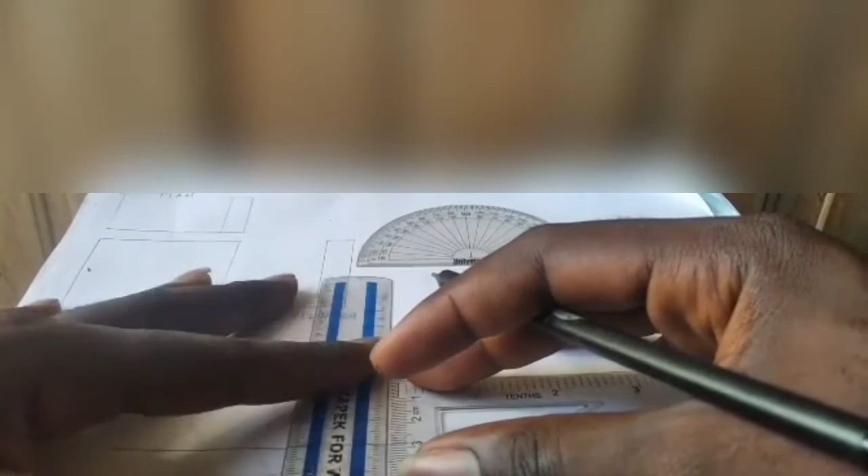So today we'll be drawing a step, and as you can see, the first step is to draw a horizontal line and draw a vertical line to bisect the horizontal line. Okay, so you have to just follow the steps one after the other. So this is step one of the first part.

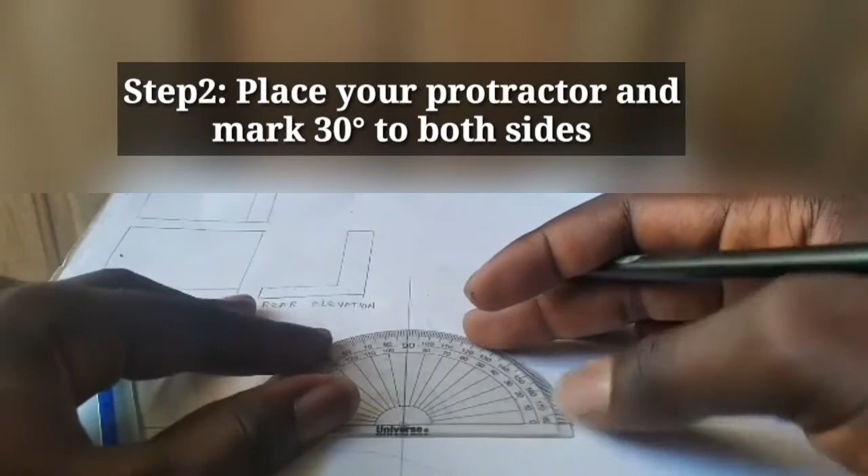So this class will be divided into two parts. One will be drawing a box, while another part will be cutting out our main diagram. So for the first step, we've done that. Now for the second step you have to place your protractor and mark 30 degrees to both sides. Okay, so let's mark it to both sides just like I'm doing right now.

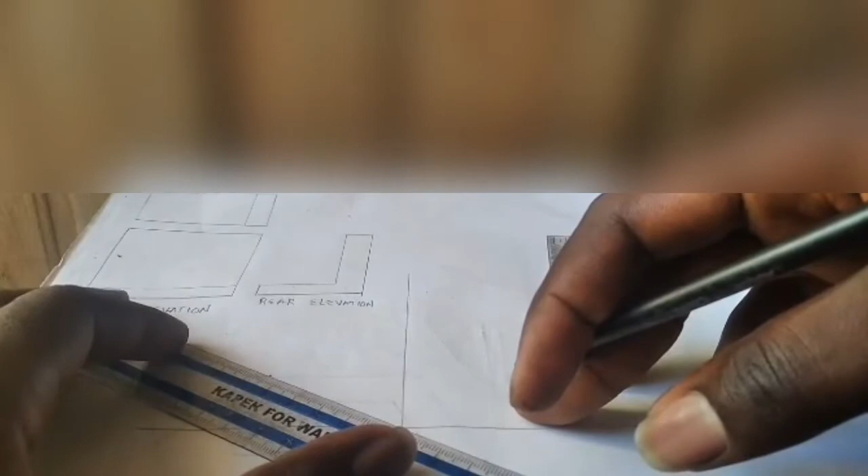Okay, now the next step is for you to join the 30-degree line with the intersection of the vertical and horizontal line to both sides. Okay, you can see the step there.

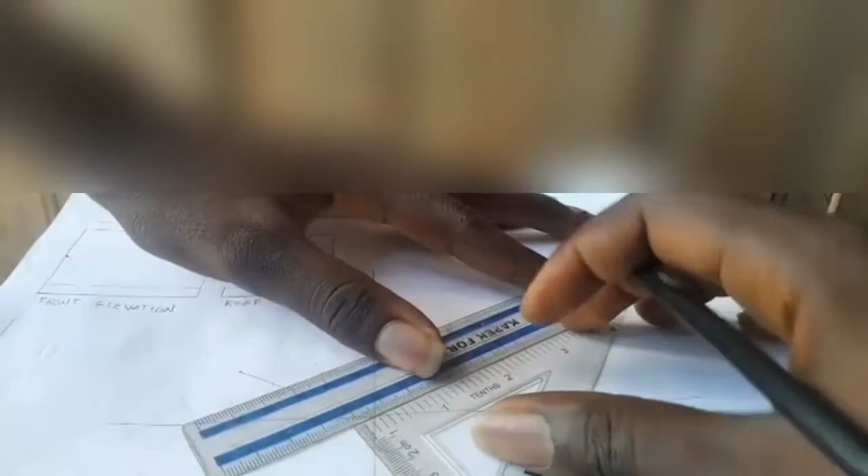Okay, so what I'm trying to do here now is to complete the box. Remember, this is the first part of the class, and the first part is for you to draw a box.

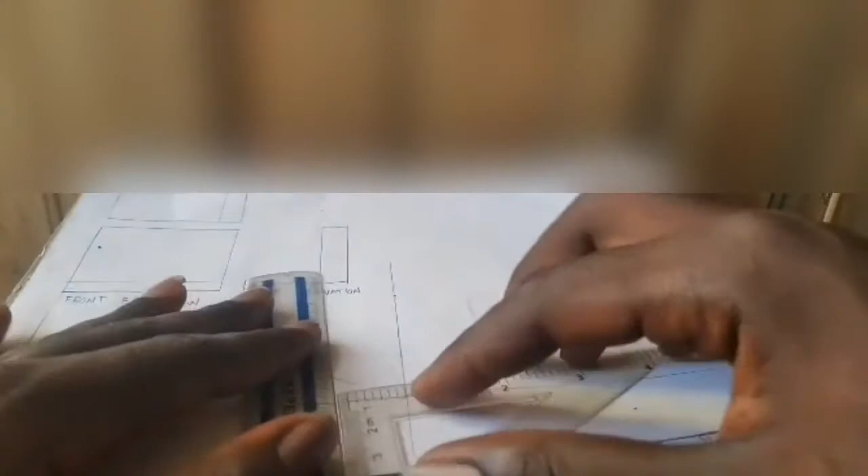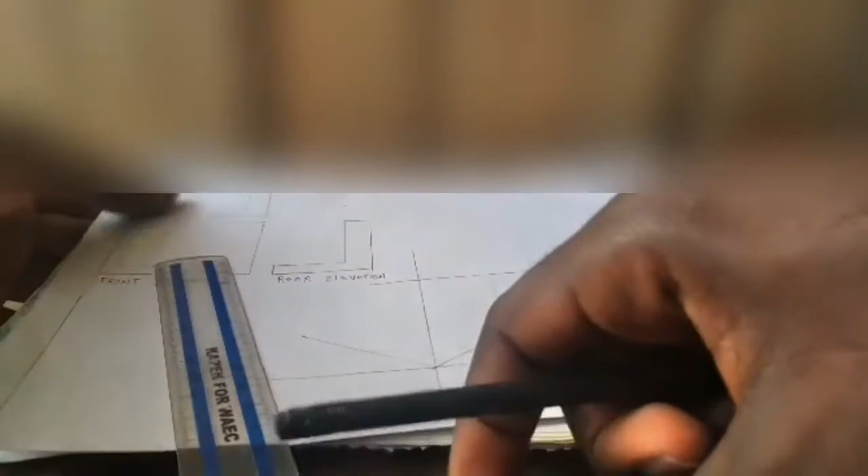And so for the next part, you have to mark out 6 centimeters on the vertical line. Afterwards, you have to transfer the horizontal line below to the vertical line you marked out 6 centimeters on. So you'll be doing that to the 6th centimeter mark.

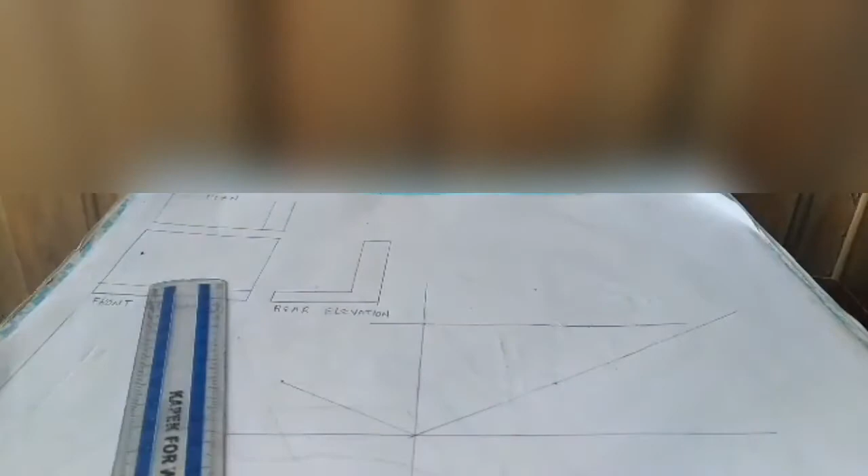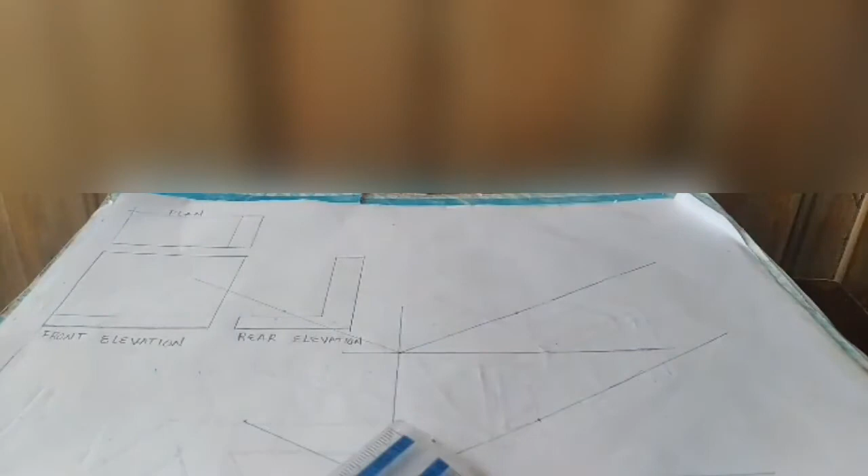Okay, so you can see, so very nice and easy. Now you have to repeat step 2, and that means you have to place your protractor on that horizontal line you just drew on the 6th centimeter mark. You have to place your protractor there and mark 30 degrees to both sides, just the way you did for the bottom horizontal line.

So we've gradually come to the end of the first part of the class. Now the target is for you to complete the block by transferring the necessary lines from one point to another.

So as you can see, I'm still trying to transfer the horizontal line from the bottom part to the top part. Since I've drawn the top part with my protractor and ruler, the target is to do a replica of what I've done already at the top, using the right specifications to the right length.

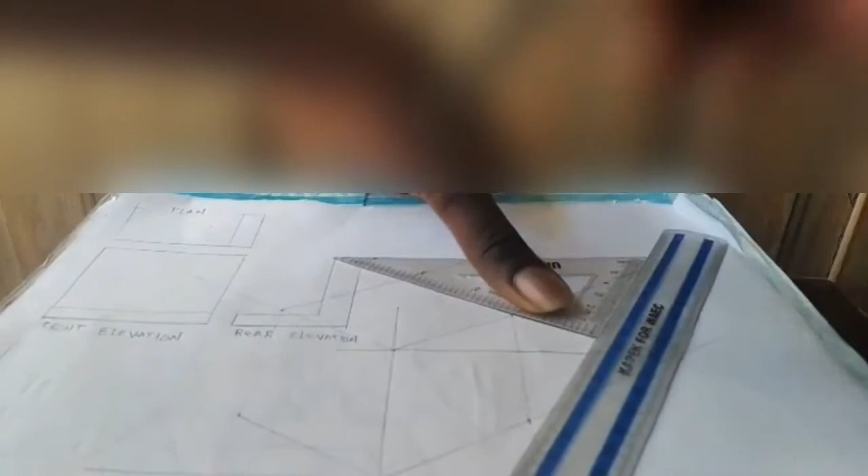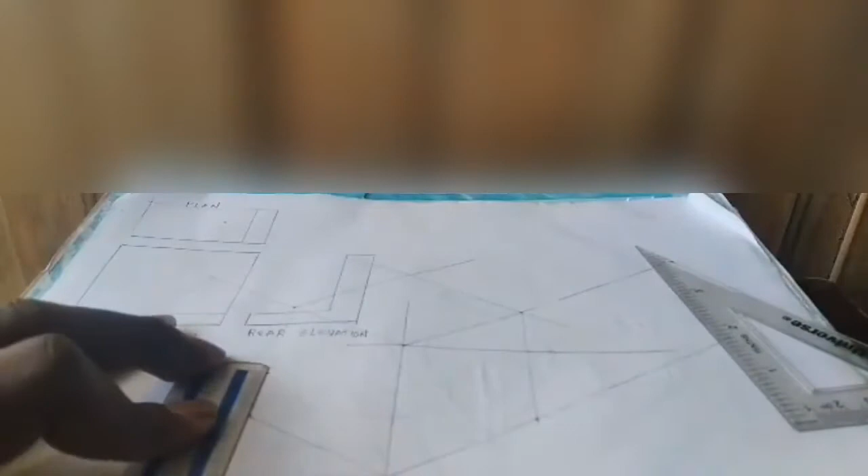So very nice, and as you can see, I've almost completed the box there, and we are coming to the end of the first part. Now the box you are drawing, note that it's a square, or let's say cube.

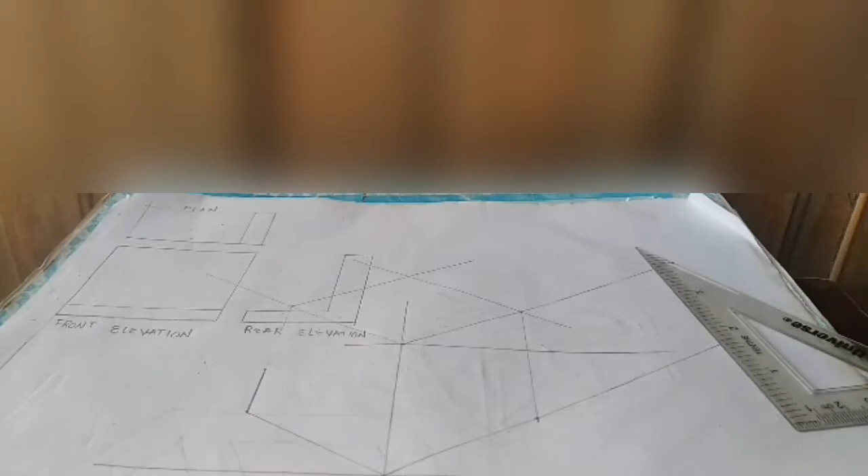And so for the next step, you have to mark 2 centimeters, not 20, on the left hand side rear elevation. As you can see, I'm still trying to mark on that 2 centimeter close to the main vertical line there.

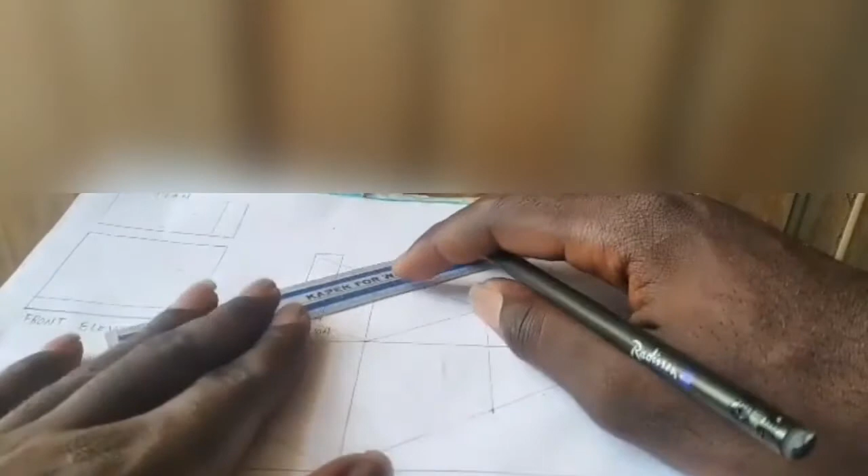Okay, now it's time to work on our plan. So the plan is the top part of the diagram. So you have to mark out 2 centimeters on the plan, just like I did. So you have to place your ruler, mark out 2 centimeters.

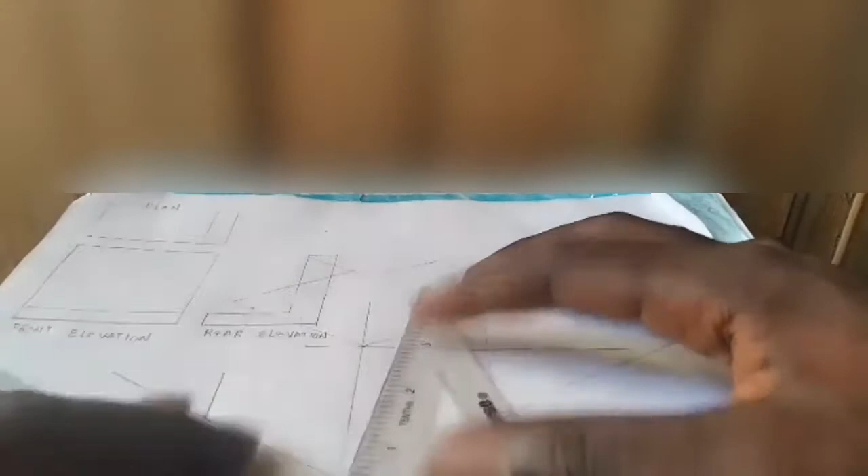Now the initial 30-degree line I drew wasn't up to 6 centimeters. That's why I'm extending it. So I'll transfer my main vertical line to the new point that will make my 30-degree line 6 centimeters. So remember, it's a cube, so all the lengths will be equal. Since all the lengths are equal, it will be 6 centimeters for both the horizontal and the vertical lines.

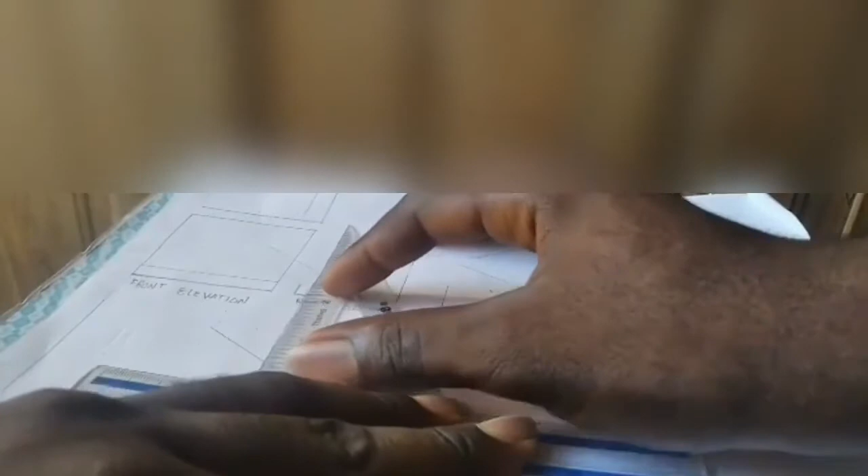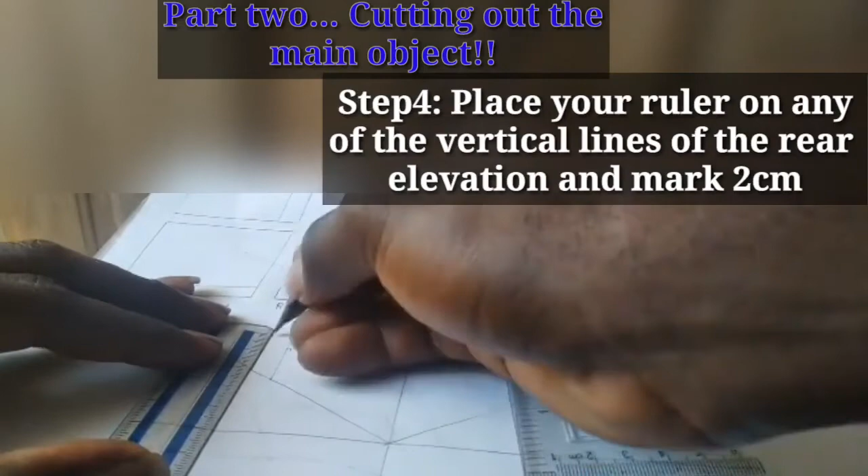Okay, very nice and easy. You can see that I've extended the diagram from the initial point to the new one. So I'm trying to erase off the error I made earlier. So finally we've come to the second part, since we've gotten our block. So for the second part, step 4, place a ruler on the vertical line and measure 2 centimeters.

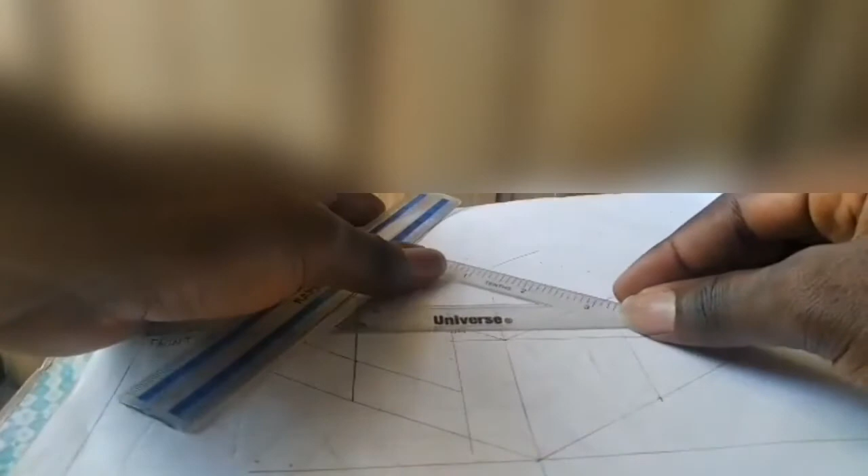So this is how the plan looks before we start proper work on it. Remember, you have to measure 2 centimeters on the block. So once you measure your 2 centimeters on the block, you have to transfer any of the horizontal lines and just draw a straight line across that 2 cm line on the plan. So bit by bit we've started developing our plan.

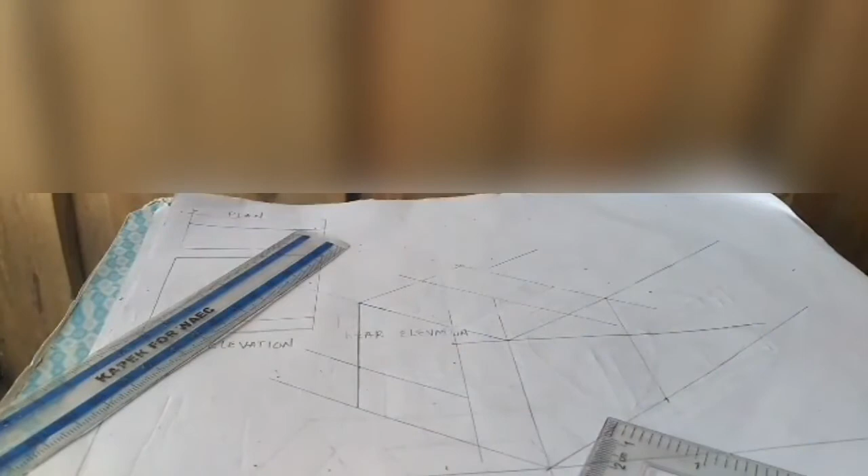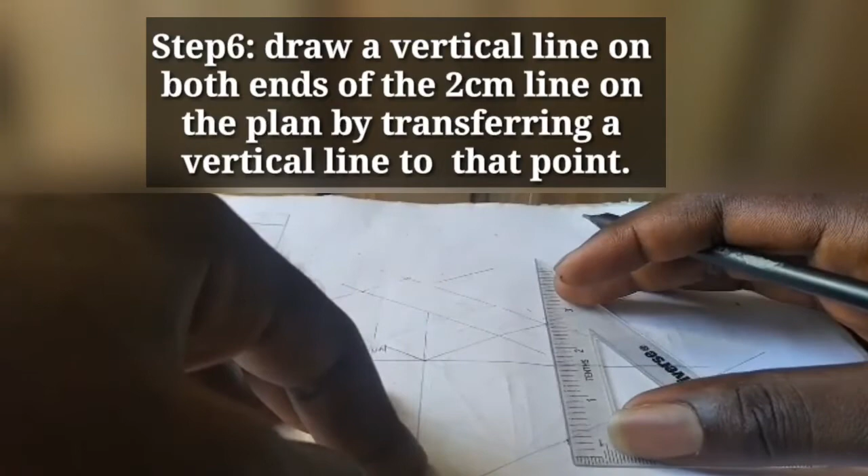Please ensure all your lines are thin, continuous lines. Okay, by the end of today's class, you will realize that you only use thick, continuous lines when you've come to the end of the drawing and you've gotten the main shape. You only use thick, continuous lines for the visible part of the diagram, for the main object. When you want to cut out the main object, that's when you use thick, continuous lines, because the function of those thick, continuous lines is for visible outlines.

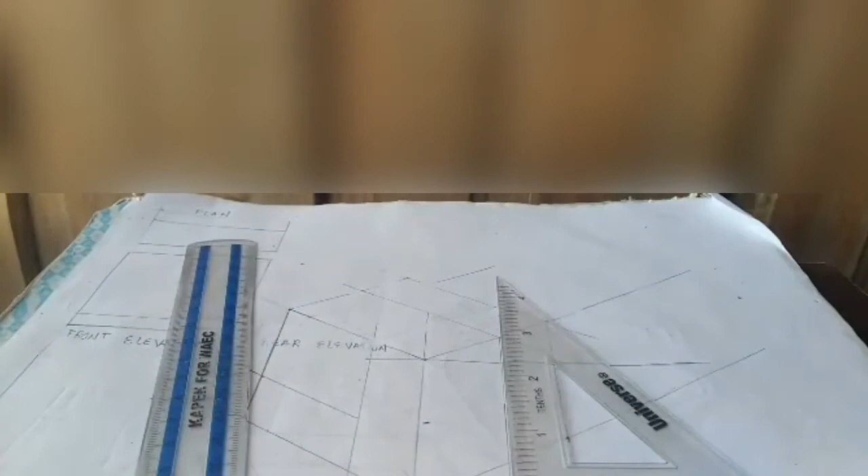Okay, but right now we are still constructing. Thin, continuous lines are called construction lines, and they're the kind of lines you use for this part of the class. So since you're using thin, continuous lines, always feel free to draw your lines to any convenient length.

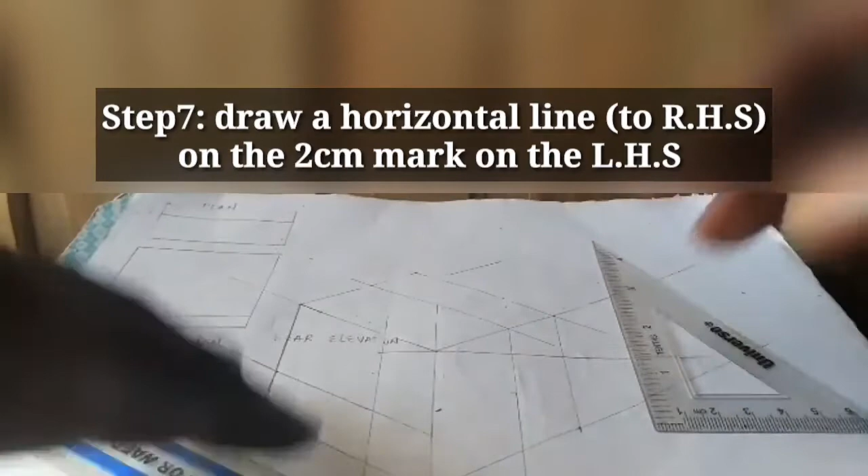Now I've skipped 2 parts already, trying to explain some terms. So I've extended my 2 cm on my left hand side. So you have to bring down the 2 cm line. You have to draw a horizontal line on both ends of the 2 cm line on the plan. Okay, so once you do that, you have to now draw a 2 cm line on the right hand side. So once you do that, you join it to the 2 cm line on the left hand side, just the way I did.

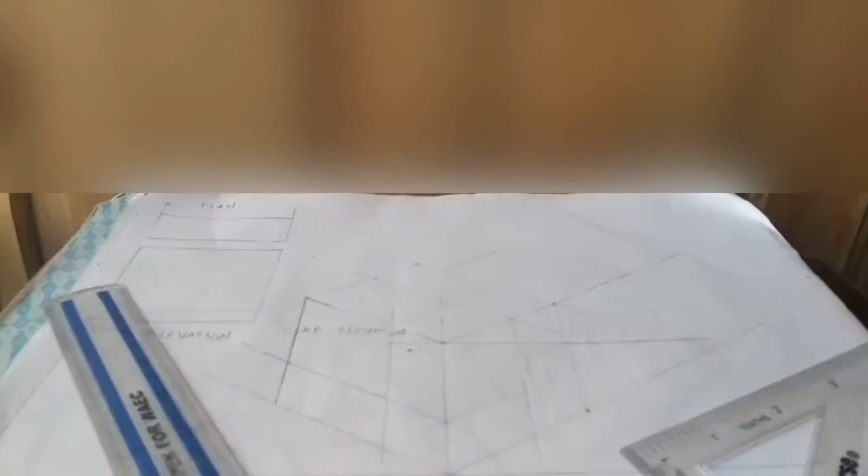So you need to be watching the video, and at the same time be doing your own drawing. So if you follow it step by step, you realize that everything is very, very easy. So please don't try to watch the video and draw later. Try to watch it and draw simultaneously.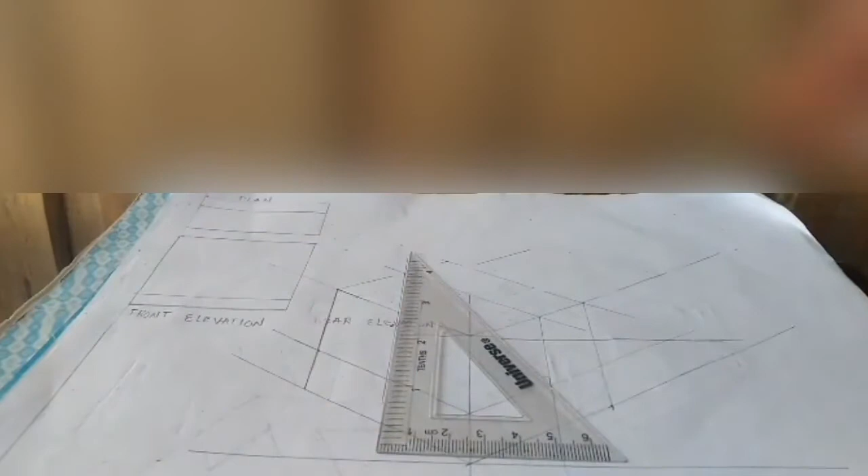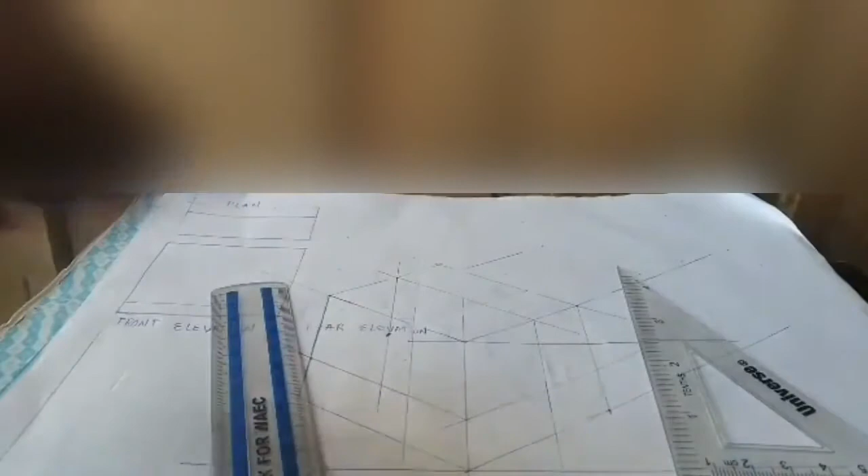Okay, now you realize that I've marked out my 4 centimeter mark on my new vertical line. That's on the left hand side of the 2 centimeter line on the plan. Yes, so on the plan you just have to mark out 4 cm for the new line you drew. So bit by bit, bringing out the main shape, we're working on the plan and the rear and front elevation simultaneously. So on the 4th cm mark, draw a horizontal line across to any convenient length.

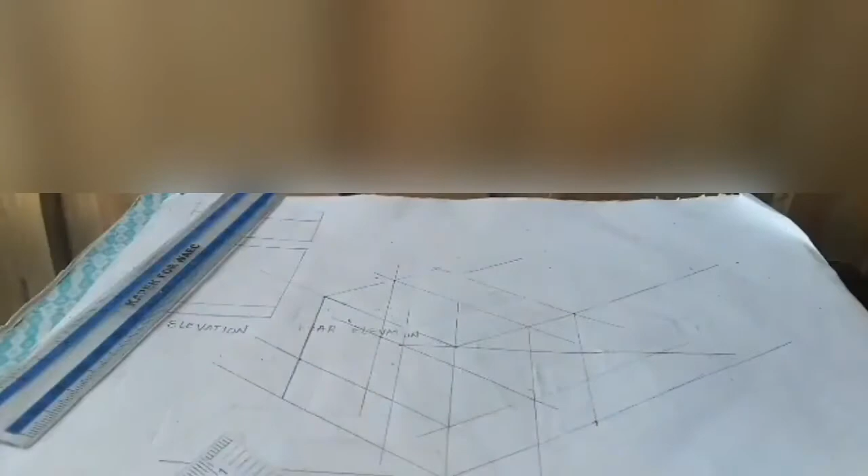Okay, so this is something I've tried to emphasize already. Always try to draw your lines to any convenient length. Since you're using thin continuous lines, these are lines you can easily erase without doing much damage to your work. These are lines that, even if you leave them after finishing your work, they don't really matter.

So you have to now join the lines just as shown. So please be doing your own work as you watch the video. And remember, practice makes perfect.

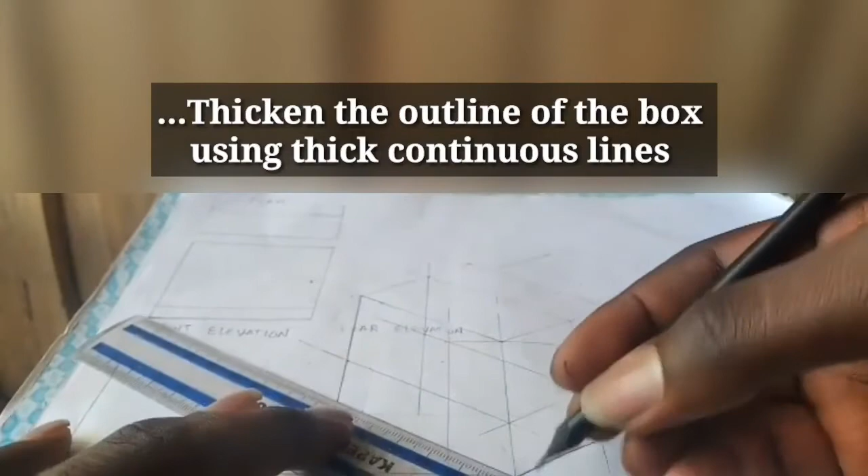Alright, so we've done most of the work already. The next thing is for you to take out the outline of the box. Okay, the initial box we drew, now take out the outline just the way I did. Please don't take out the entire outline, just follow my steps and take out only the part I've taken out, okay, because there are some parts you still have to erase at the end of the diagram. So hope you can see the diagram clearly.

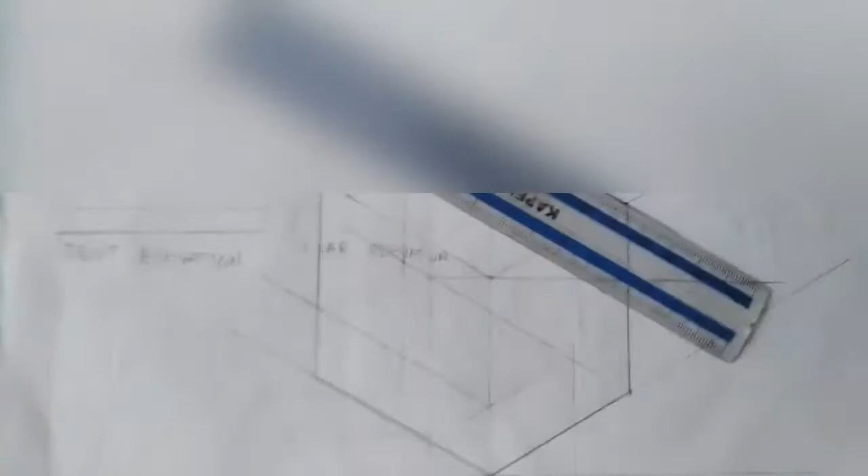So at the start of the class, I indicated the plan, the rear elevation, the front elevation. So once you are done with the video, you can confirm to see how the plan, the rear elevation, the front elevation actually relate, and how you can cut them out just from drawing a box.

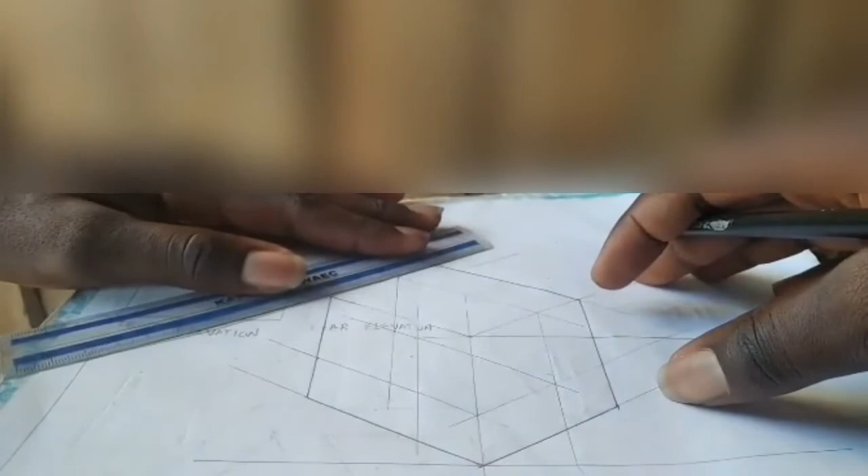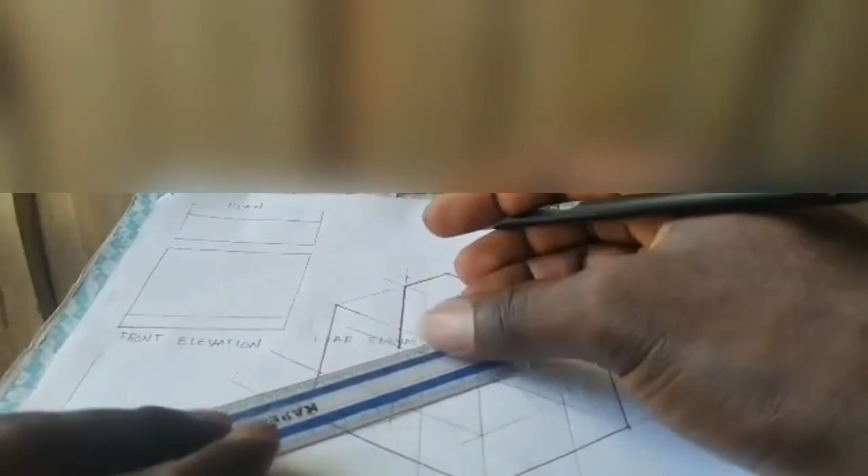So the last step now is to just cut out the main object using thick continuous lines as shown. Okay, so you have to watch the way I'm cutting out my own diagram, because we've done the hard part. It's just for us to carefully bring out the main diagram now. So you just bit by bit follow my lead. Okay, so you have to take that one out too. Just take that one out too.

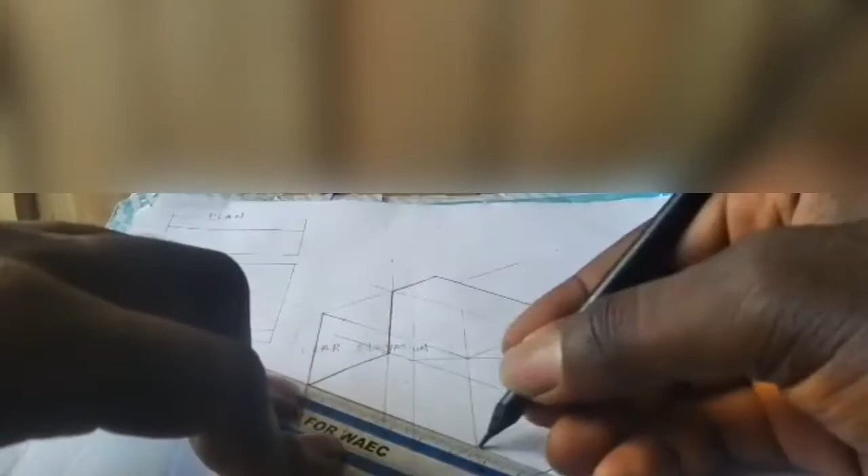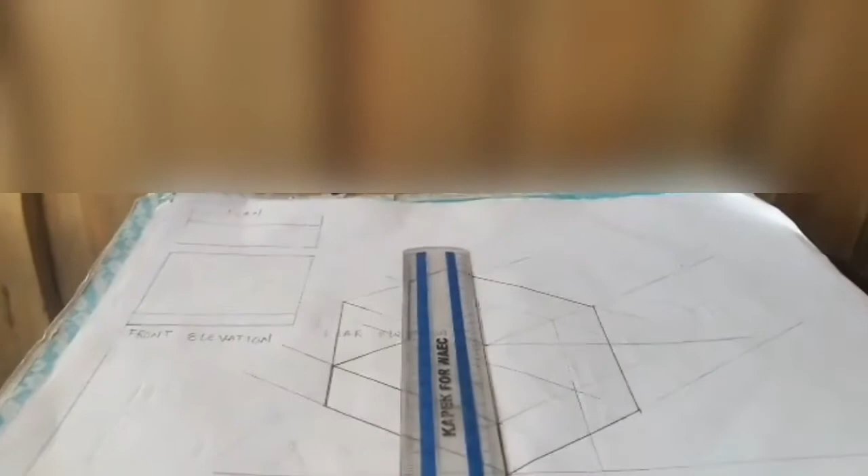Okay, remember, thick continuous lines now. Please only use thick continuous lines at the end of your drawing, and only use them for the main object. Okay, you can see the main object is coming out now. Just a few more minutes and we're done. Remember, this might take you a lot of time, but practice makes perfect. The more you practice, the better you get. Remember, isometric drawing is that type of pictorial drawing projected at 30 degrees to the horizontal.

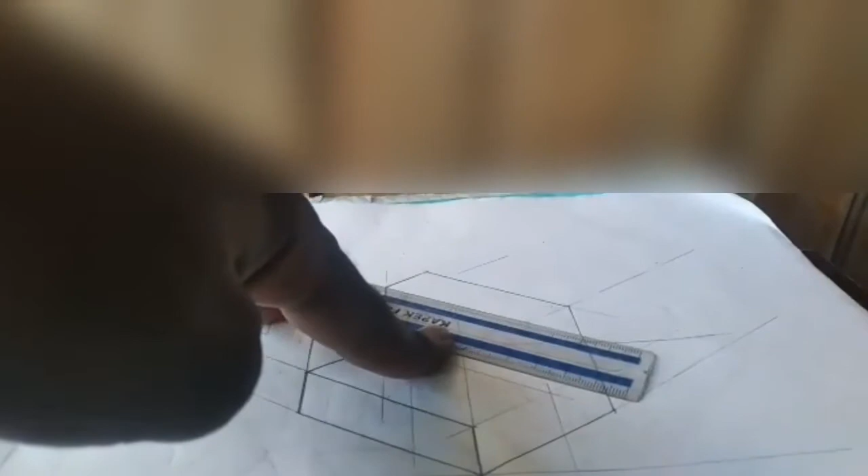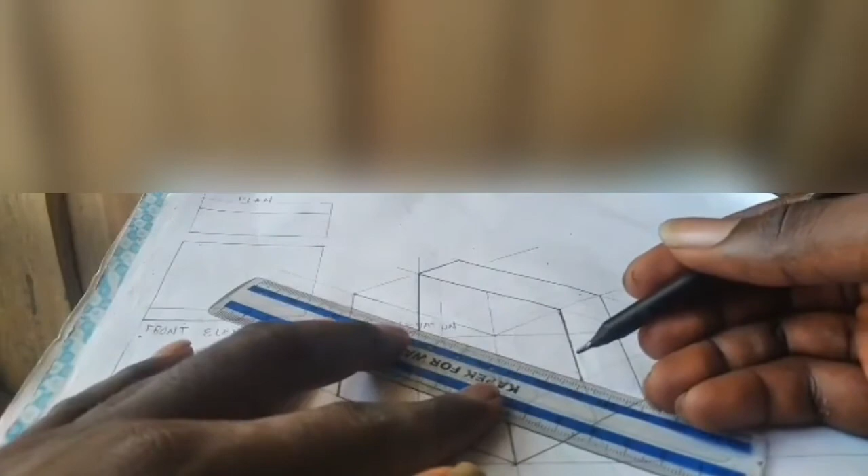So one last step, that is to thicken out your object using thick continuous lines. Okay, you can see the main diagram coming out. This is not really a step anyways. I couldn't really find a befitting name to give the diagram, so I just did the step. But anyways, the idea is to learn how to draw this particular object in isometric drawing.

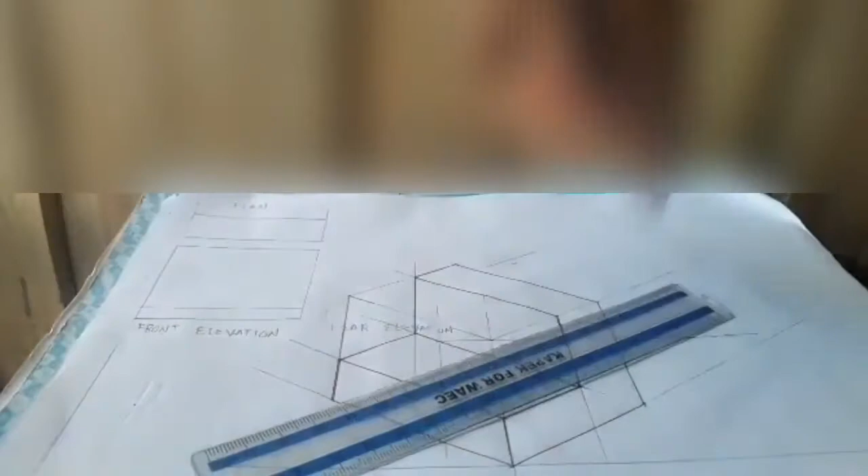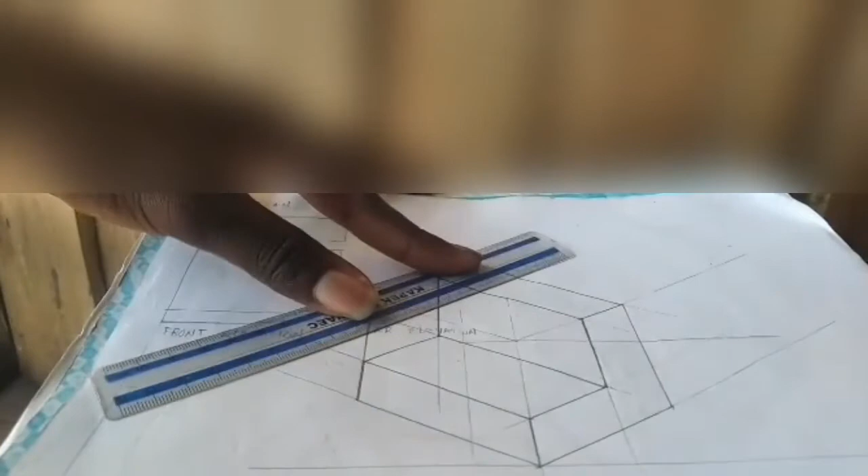Okay, and remember in my previous classes I stated that we use two methods. One is the drawing of a box method, which we are using right now. So you have to draw a box, then cut out the main object, or the alternative to that is for you to use your front elevation and draw the entire diagram. Okay, so I'll be dropping more videos on that, using your front elevation to draw an object. Okay, so you'll soon have a better view of it.

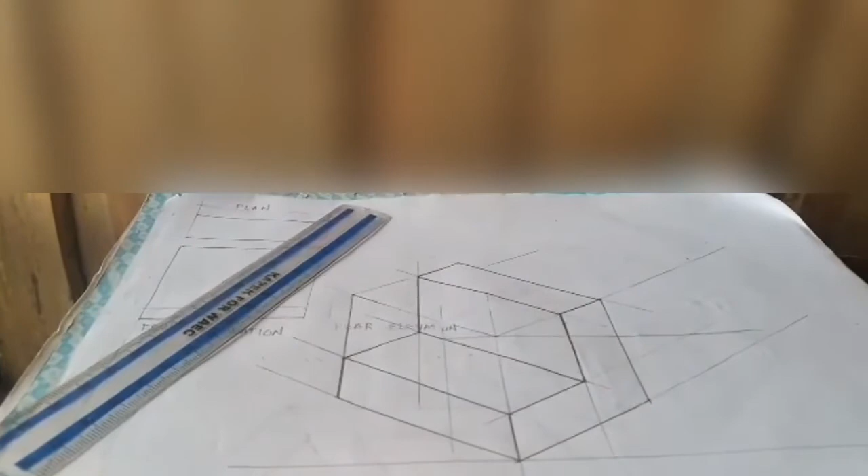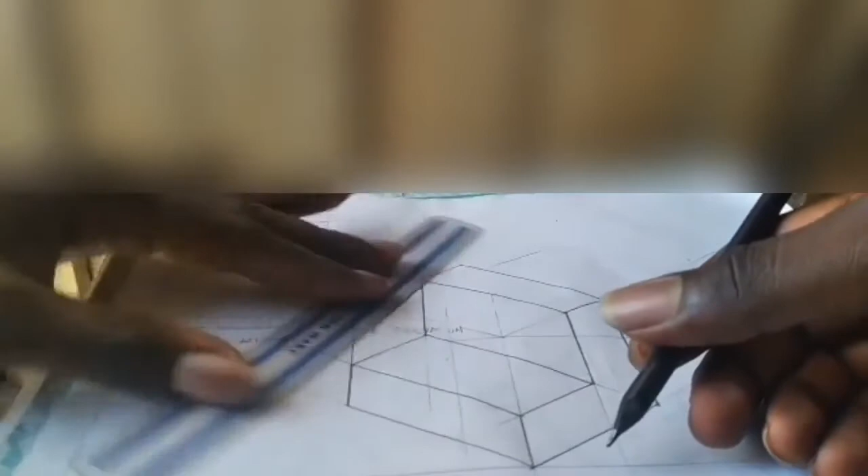So yes, the next thing for us now to do is to erase the needless part of the diagram. So you just have to carefully erase the parts we don't need anymore. Okay, we're back. So it's time for us to now erase the parts of the diagram we don't need and to write our specification. Okay, I just want to thicken out my diagram a bit more, because this is the part where you have to use a thick continuous line. This is when you have to really show the diagram.

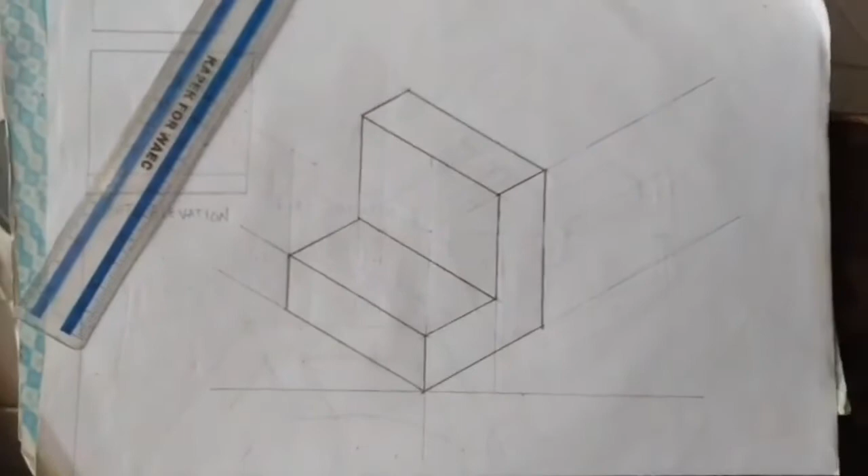So okay, gently erase the needless part of your work, and you are done. You know, for erasing the needless part, you don't have to erase everything, just some of the needless parts. Yeah, and this is how the diagram looks. Next part is for you to just write your specification. Okay, the 2 cm, the 6 cm, horizontal side, the vertical side. Just thicken out your diagram a bit more, and you write your specification.

So yeah, and here we go, the complete diagram. Finally, the finished work.